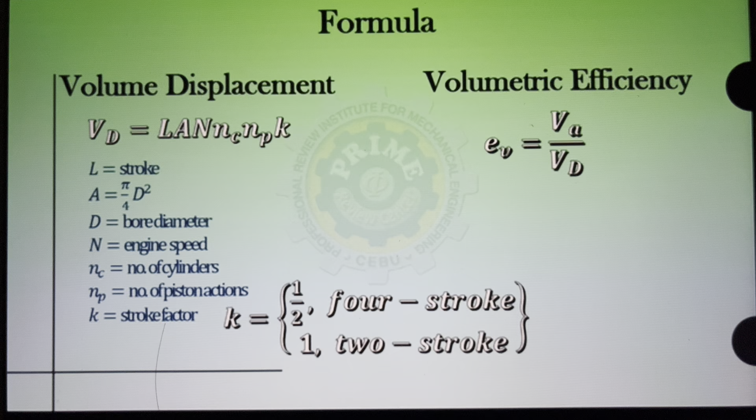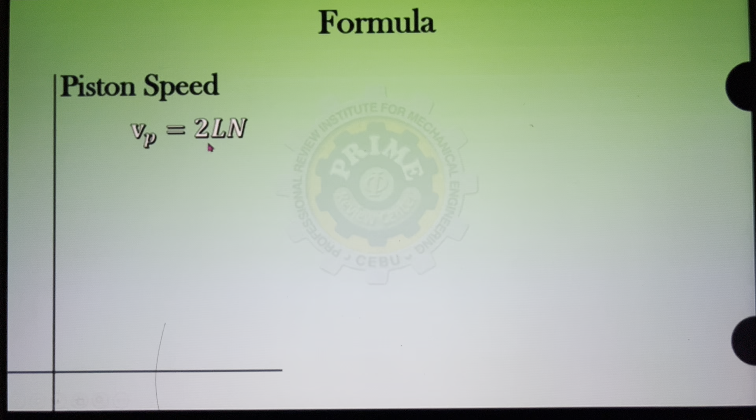Then, meron din tayong tinatawag na piston speed. Ang speed ng piston, we have the formula 2LN. Ang L, take note, that is the stroke. Bakit twice? Kasi syempre, yung piston natin tataas at the same time bababa para makakomplete ng isang revolution. Kaya meron kang multiplier na 2.

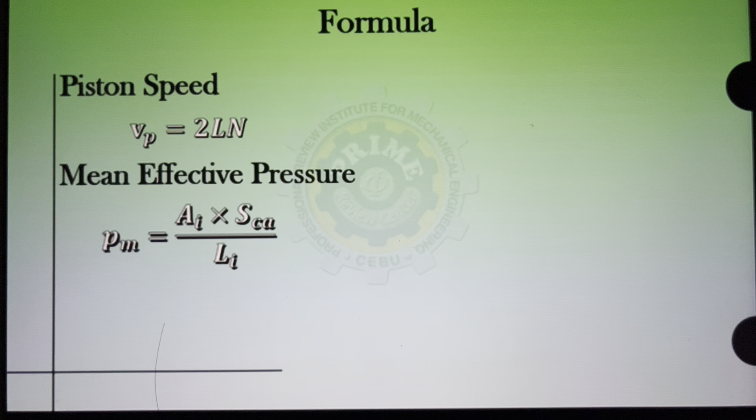Then we have also the mean effective pressure. Pag sinabi nating mean effective pressure, that is the average pressure or the area under the curve doon sa tinatawag na indicator diagram natin. Kaya meron tayong formula rin, no? Ito yung formula kung binigay ang data ng isang indicator card diagram. So, wherein A sub I is the area, scale, SCA, spring scale, L sub I is the length ng indicator card.

Meron tayong power. Ang power natin, nagkaklasify yan, depende dun sa point na gusto mo ang kuhanan ng power. Kaya nakita naman natin kanina, sa flow natin, kay palit ng palit yung power. So, generally, power can be solved through mean effective pressure times the volume displaced.

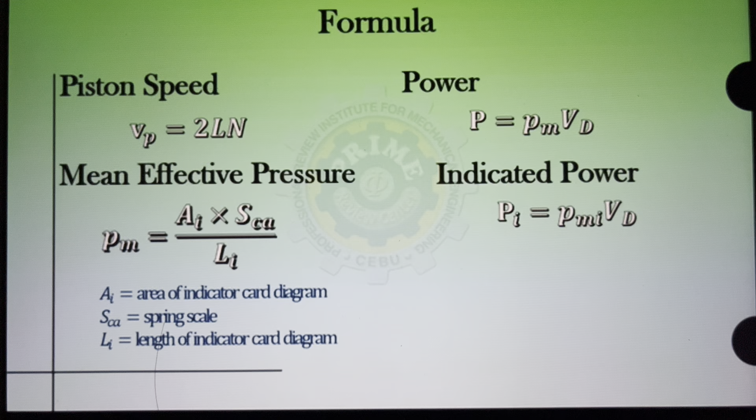Simulan natin, we have the indicated power. Kaya tinatawag din ang indicated power as the power produces in the cylinder. Kaya yun yung term niya, produces, present tense. Okay, so this is the formula. Same lang dito sa ating general formula. Kaya lang take note the subscript. You have the mean effective pressure indicated.

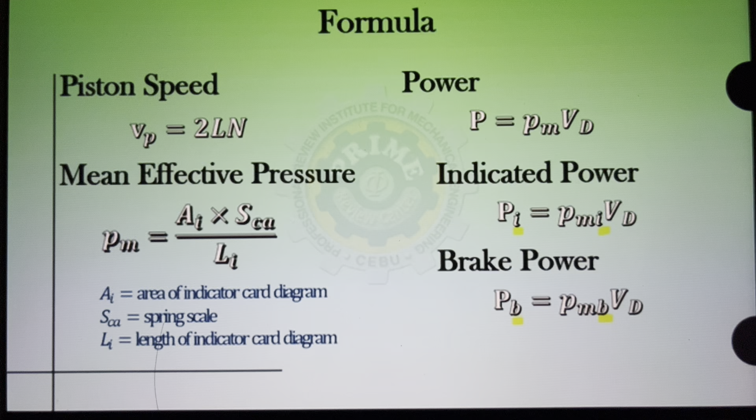May subscript I. Next, we have the brake power. Okay, so ito naman yung power na nasa shaft. Nabanggit na natin yan. This is the formula. So, nababago lang yan. Depende sa klase ng power. Kung brake power, the brake mean effective pressure naman. Okay, so ito nga yung flow natin ng indicated and brake power.

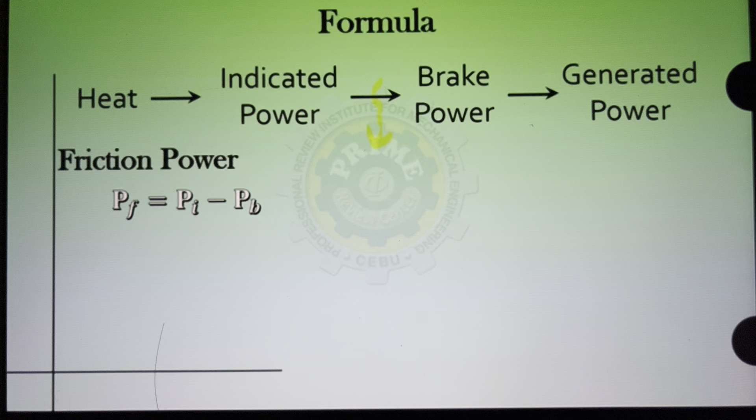So, between them, meron tayong tinatawag na friction power. Yun na nga yung power loss due dun sa shafting, friction. So, this is the formula. Simply the difference ng indicated saka brake. Then, at the same time, meron rin tayong tinatawag na mechanical efficiency sa part na yan. So, that is simply the ratio of the output over input. Sa part na to, ang output is brake, input is indicated power.

Aside sa mechanical, meron tayong electrical efficiency din. Since nakakonect din sa generator, pwede rin natin tawagin generator efficiency. Ito yung part na yon. So, ang output is the generated power at yung pinaka-input sa generator is yung brake power. So, yun yung dalawang efficiency natin. Mechanical at electrical.

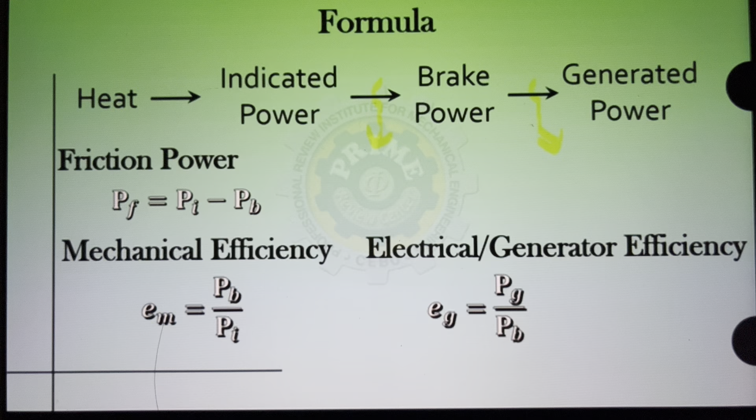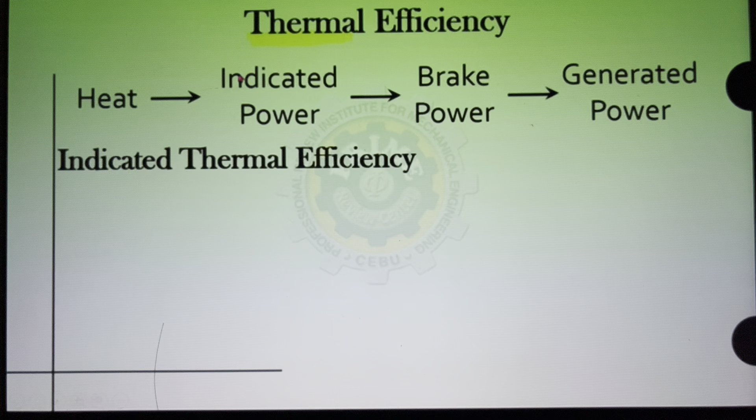Aside doon, meron din tayong ibang klase ng efficiency. Ito yung tinatawag na thermal efficiency. So, ito pa rin yung flow of energy natin para makita, no? So, in thermal efficiency, meron yung tatlong klase. From the word thermal, involve yung heat. So, meron tayong tatlong types. Una, we have indicated thermal efficiency. So, ito yung magka-partner, heat at saka indicated power. So, ang output is the indicated, ang input is the heat.

Then, meron din tayong tinatawag na brake thermal efficiency. So, magka-partner, syempre, heat at saka yung brake power. Then, lastly, we have the combined or the overall thermal efficiency. Yan naman yung dulo-dulo. Ang magka-partner is the heat at saka yung generated power. So, kaya yan yung formula natin.

Okay, so hindi naman yan magkakaiba yung formula. Same lang format, no? Yung term niya lang talaga yung mahalaga.

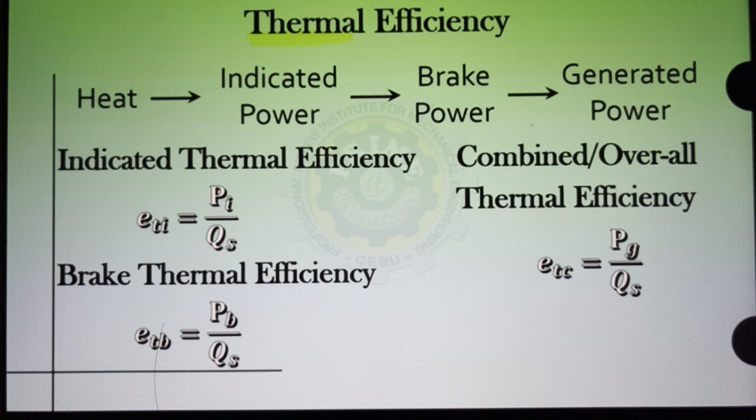Okay, may isa pa tayong efficiency. Ito yung tinatawag na engine efficiency. Ganun din, meron tayong tatlong klase ng engine efficiency. Siyempre, depende sa power or point na gusto mo i-consider. Ganun ulit, we have the indicated engine efficiency. Yung formula, madidistinguish naman yan dun sa subscript. Ang definition ng engine efficiency is thermal efficiency over the cycle efficiency.

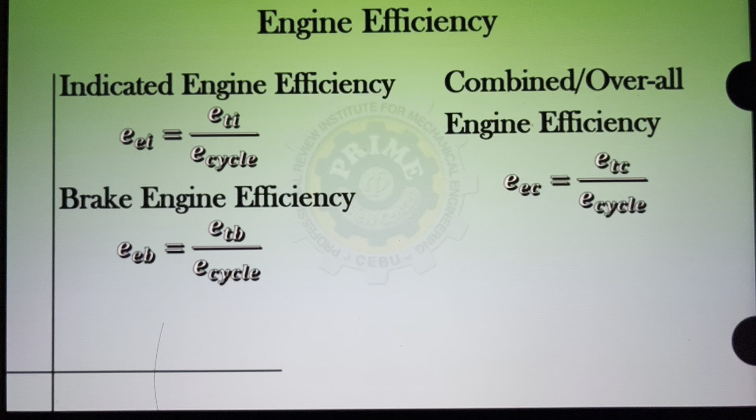Tuloy muna natin. Meron tayong brake engine efficiency. Ito yung formula. Brake naman siya. Combined overall engine efficiency. Ang partner niya may combined thermal efficiency. Basta yung tatlong yan, ang mahalaga sa engine efficiency, thermal over cycle.

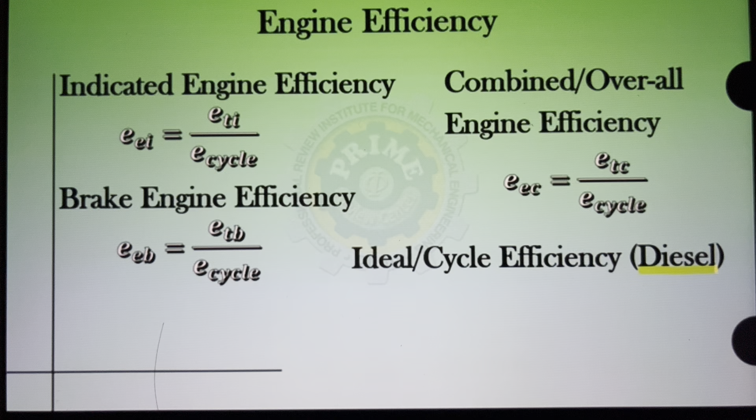Ano ba yung cycle natin? Yung cycle natin, yun yung ideal efficiency or ideal natin cycle, which is the diesel. Since yan ay nasa diesel power plant. So kung i-recall natin sa internal combustion engine natin na topic, ito yung formula natin.

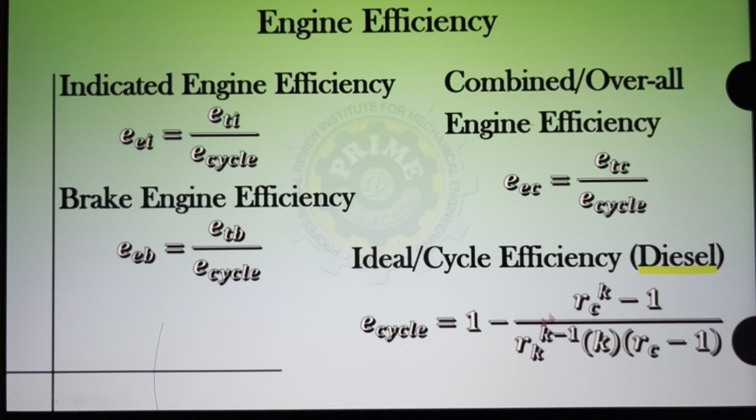So, these are the parts involved. We already know some of these, right? K is the ratio of specific heat. RC is the cutoff ratio. RK is the compression ratio.

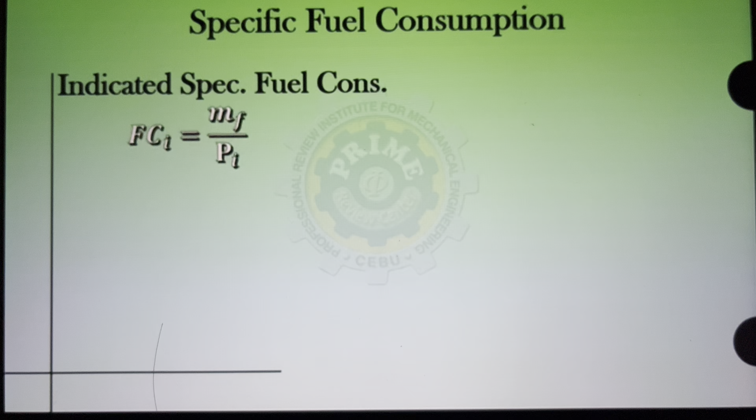When you say fuel consumption, that is mass of fuel divided by power. Only the power changes, depending on the type of consumption.

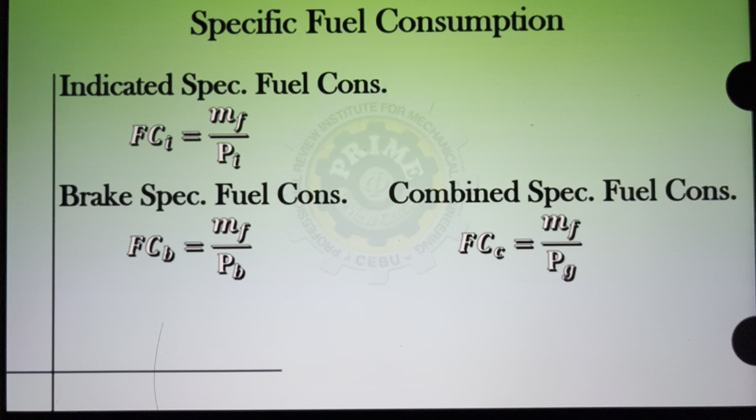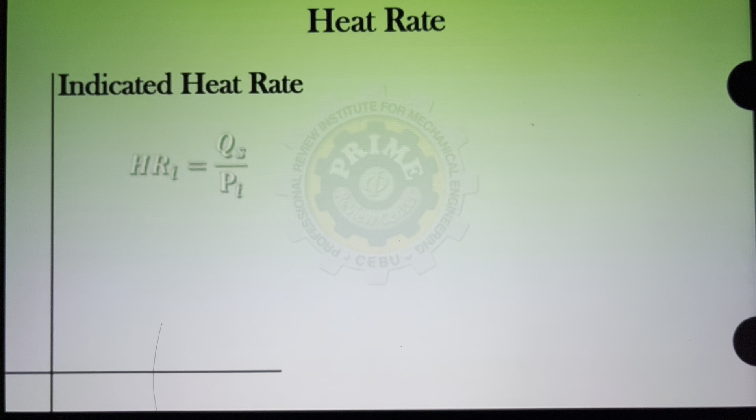Next, we have heat rate. The heat rate is the ratio of heat to power. So there are three: indicated, brake, and combined heat rate. Let's repeat: heat rate is heat supplied over the power.

We have the parts there. We have P sub S, which is the power at sea level. We have P actual, which is our actual pressure. We have actual temperature, and these two are part of our computation.

So we have the empirical formula. The actual pressure is 29.92 minus H over 1,000, where H is the altitude. And the actual temperature is 520 minus 3.6 H over 1,000.

This is empirical, so remember the units: actual pressure is in inches of mercury, actual temperature is in Rankine, and height is in feet. Make sure to remember those units.

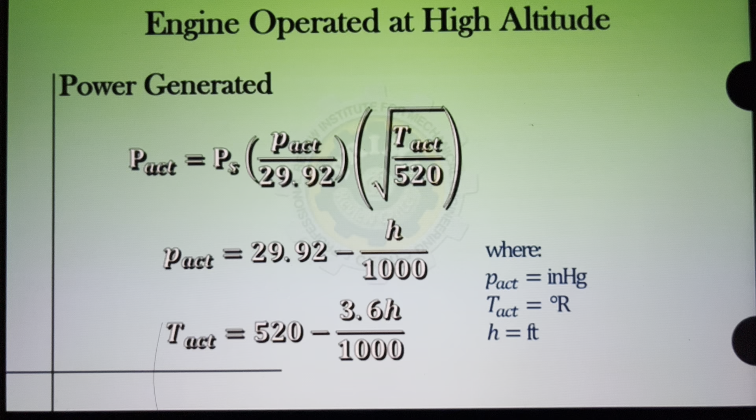So that's our diesel electric power plant.

Problem number 1. A 12 by 18 inch, 4-cylinder, 4-stroke, single-acting diesel engine is rated at 200 brake horsepower at 260 RPM. Fuel consumption at rated load is 0.42 pound per brake horsepower-hour, with a heating value of 18,920 BTU per pound. Compute the brake mean effective pressure.

So these are our given values. We have the diameter, 12 inches—let's convert that to 1 foot. Our stroke is 18 inches, which in conversion is 1.5 feet. Then we have the number of cylinders, 4. Piston action is 1. It's 4-stroke, so our K is 1/2.

Then the power given is 200 horsepower. Based on the unit, that is brake horsepower, so it's brake power. We have the engine speed, 260 RPM.

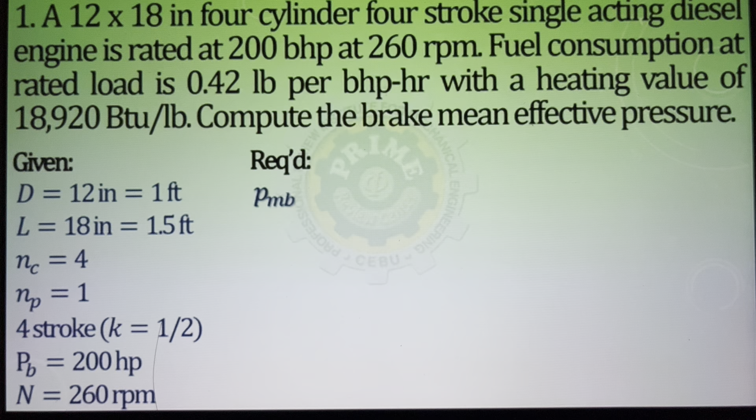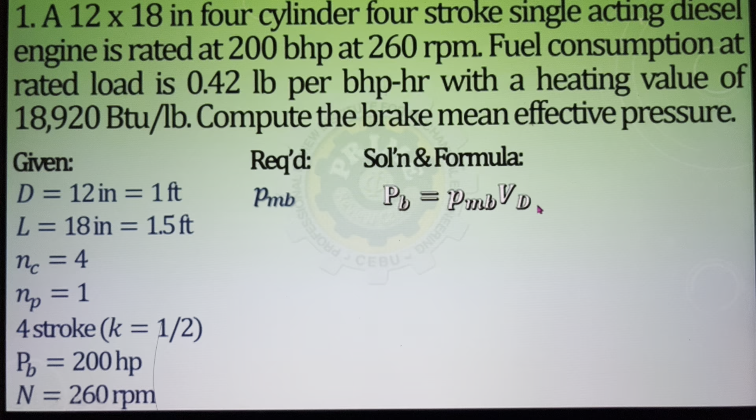So since we're looking for brake, let's define brake power: that is brake mean effective pressure times volume displaced. And note, the volume displaced has its own formula.

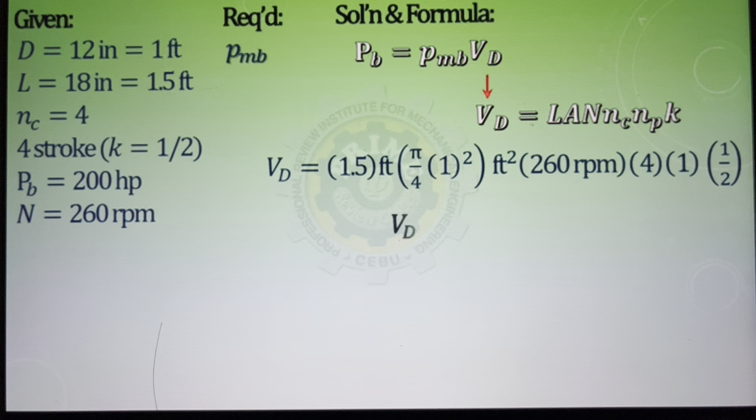So we can get the volume displaced first by substituting our given values. Volume displaced now is 612.61 cubic feet per minute. The revolution units cancel out since that's per revolution.

Once we get the volume displaced, we can substitute it into our original equation. We now have 200 horsepower equals the brake mean effective pressure times the volume displaced.